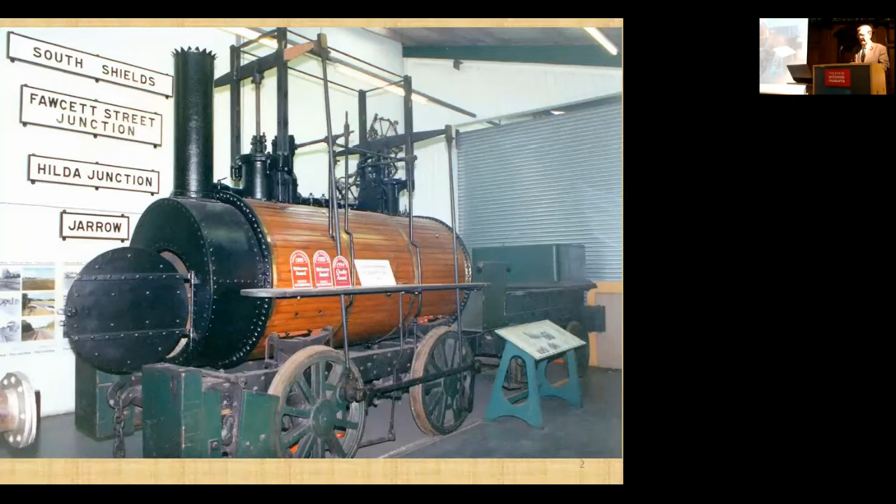So here we have a loco that, okay, it's in the Killingworth type format. We've got 2 cylinders set into the crown of the boiler. We've got an iron frame, very light frame, on top of which are 4, taking the 2 sides, 4 steam springs, which of course were part of that patent. The wheel sets were combined by the use of a surging chain, to use the term that they used, a surging chain.

So that's the locomotive as it first was constructed. But very soon, a number of alterations and improvements were made, which we will follow through in the trail of how it got from looking like this to how it looks as we see it today.

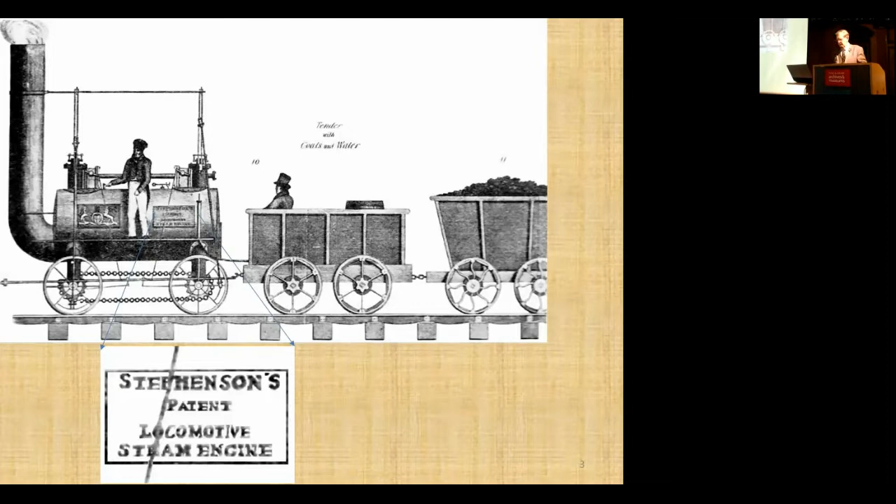So the first alteration that was made in the early 1820s was to increase the size of the wheels from 3 foot diameter to 4 foot diameter. Now, Nicholas Wood, in his treatise of 1825, tells us all about this improvement and how it benefited the performance of the engine.

Subsequently, the locomotive was reformed at the Robert Stephenson Co factory here in Newcastle. Some of the Killingworth locomotives were reformed at the factory, and almost certainly Billy was amongst them.

The steam springs were removed and replaced by plate springs. The plate springs were first used on the Killingworth line in 1827. They were first fitted to the vehicles, the wagons. They worked successfully, and so they then tried them out on some of the locomotive fleet on the line. And therefore, it's almost certain that Billy would have received the spring set at some time in the late 1820s.

Also, the surging chain has been removed and replaced by coupling rods. Now, the instigator of these alterations was almost certainly Nicholas Wood, because by this time, George Stephenson had moved on, and although he never lost his interest in what went on at Killingworth, nevertheless, Nicholas Wood played a day-to-day role and was almost certainly the instigator of these improvements. But she carried on with her same boiler.

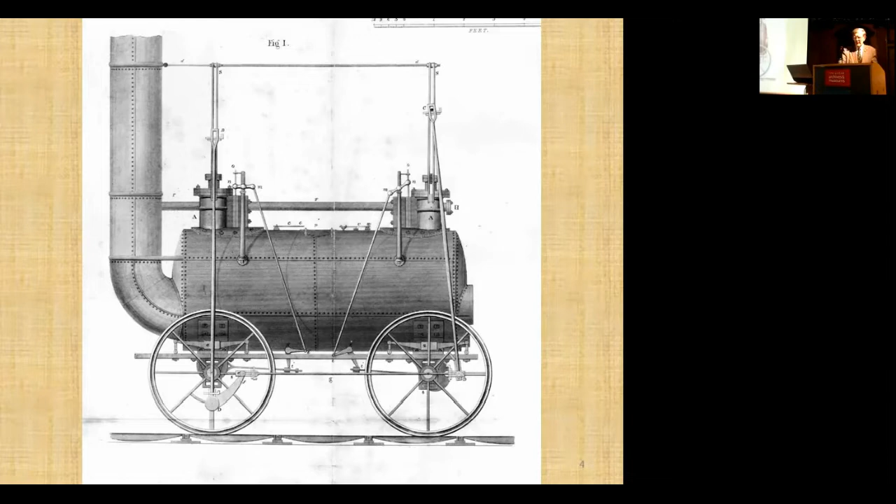The next alteration that took place was shortly after 1830, because here in Newcastle, the Robert Stephenson factory not only successfully won the Rainhill trials, but they also carried on developing the mainline locomotive, including the introduction of the sandwich frame, which was so much more robust than that light iron frame that we saw earlier. And all of the Planet class locomotives that operated on the Liverpool and Manchester Railway were fitted with sandwich frames. They were robust and made of oak or ash, plated on either side with wrought iron plates, hence the sandwich.

And so it's interesting that when Peter and I carried out a study 3 or 4 years ago, and Peter joins us this afternoon so we'll be able to speak with him later, we saw that the framework on Billy is of a sandwich frame type.

You see there the bulk of timber, the oak, and on the outer side is the plate of wrought iron, and on the inside there is a similar plate, but there are angle irons instead of ordinary straight plates. And in the lower photograph, you can see one of the stretcher beams going across the midpoint of the locomotive, again made of an oak beam plated on either side by wrought iron. So that means that the frames that we now see on Billy date from the early 1830s.

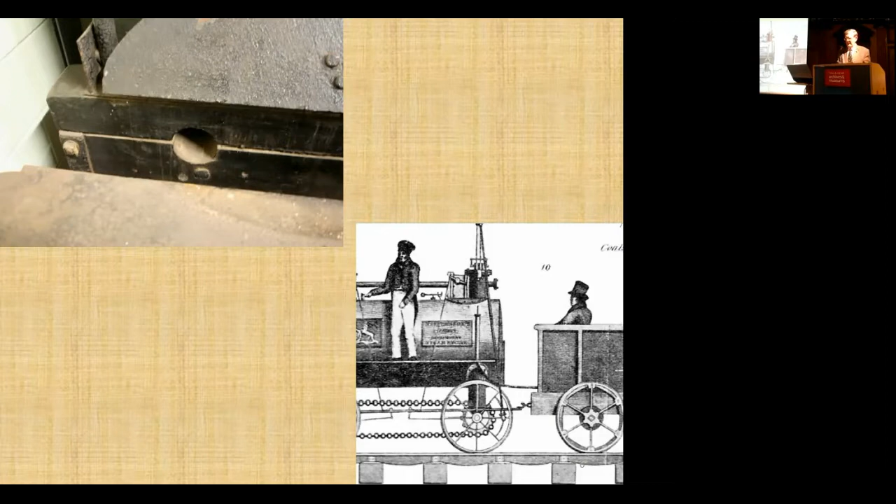The next thing we noticed from the records of the Robert Stephenson Company is that they took in more locos from the Killingworth Colliery, including almost certainly Billy, though they never identify which particular locos they served. The boiler was reformed. That 20-inch flue that was run through to start with was replaced by a similar diameter flue for the firebox. There was a round or slightly oval firebox. At the halfway point the tube plate was inserted, and from there to the leading end were a nest of tubes. The leading plate was a flue plate, and in advance of that was the smoke box upon which sat the chimney.

So although Billy carried on using the same boiler cylinder, the technology improved enormously, taking advantage of all that had been learned at Rainhill and afterwards, and a whole series of tubes were inserted, increasing the heating surface no end.

So the only other alteration to point out is the wheels. The original cast iron wheels were very vulnerable to breakage - they broke several times. Timothy Hackworth introduced the 2-part cast iron wheel, allowing the outer part to be replaced without needing to take the whole wheel off the axle, which was very time consuming. They could take off a cracked rim and replace it with a fresh rim much quicker than changing a complete wheel. This answered one of the main criticisms of the earliest wheels supplied by the Stephenson Company and others.

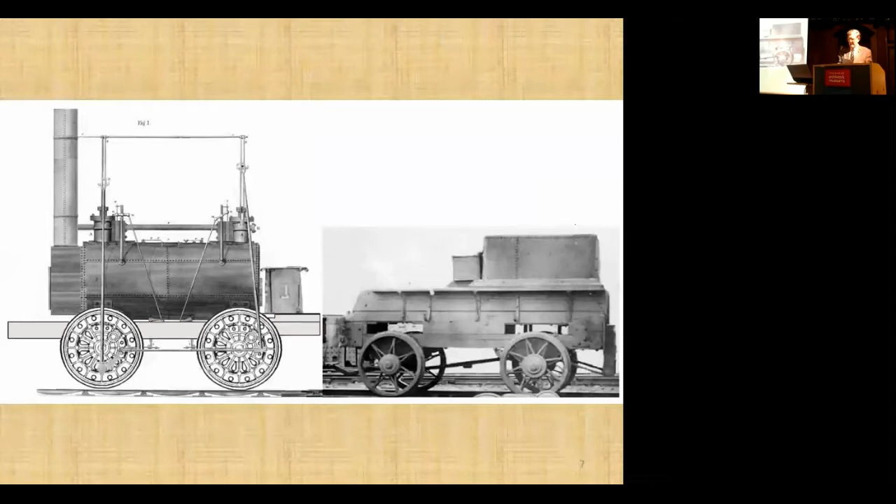But when Peter and I examined the boiler, we found a boiler of a different era. This was not the original boiler, it had been replaced. A boiler of this type would almost certainly belong to the late 1840s. You see it has a three-ringed boiler, and the boiler itself is not only longer but also of greater diameter - 10 feet long and 4 feet 3 inches diameter.

So that was interesting because it posed the problem: who made this replacement boiler? It's quite possible that the boiler was made on Tyneside, possibly by the Coulthard Company of Gateshead, who specialised in the provision of railway equipment for collieries and colliery railways.

So we were able to examine the boiler in some detail, and this is the first of a number of splendid drawings prepared by Peter, which make understanding of the locomotive so much easier than just looking at photographs. You can see there a cross-section of the current boiler. It's much along the lines of what I was just explaining, how it had been reformed originally in the 1830s, but this belongs to the 1840s.

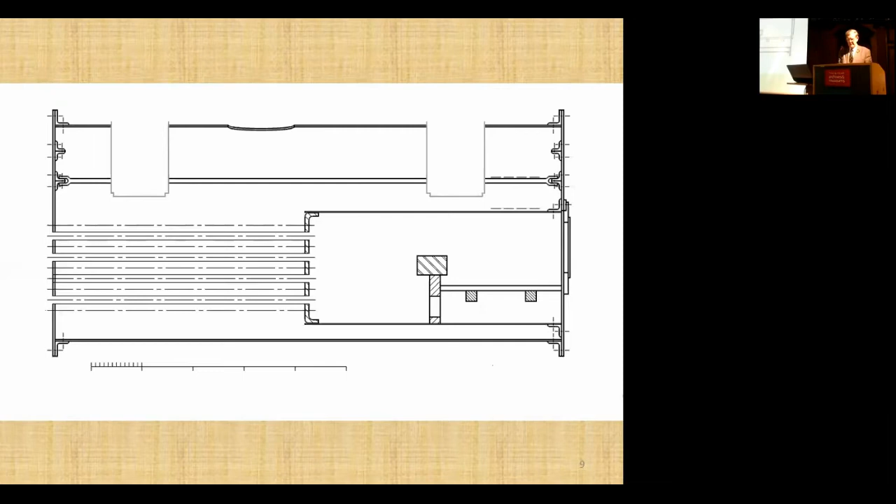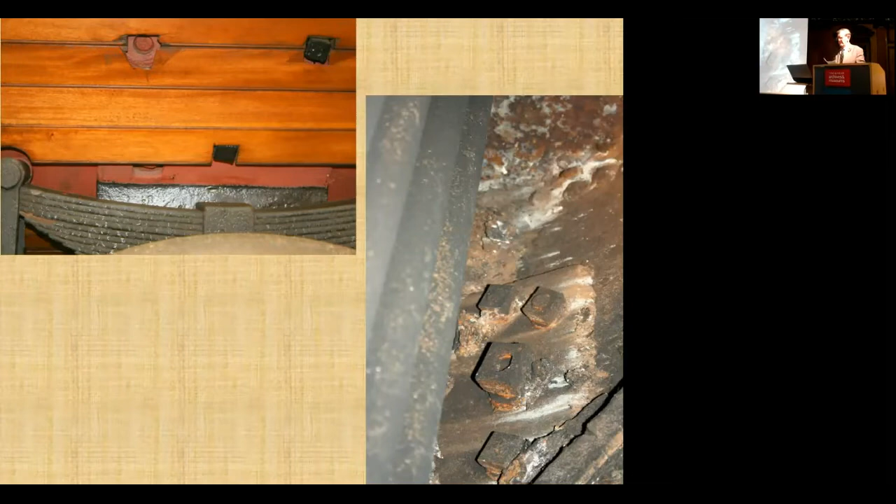The boiler was supported by brackets fitted to the frame. The feet of the brackets were bolted through the frame, and the upright of the bracket was curved round the boiler, and you can see that it was bolted into place. All four brackets were bolted into place, which means there was no expansion slide at all.

Every time the boiler was used, it must have been a bit like a banana wanting to bend. And so stresses were set up in the bolts and the holes of the bolts. And there was evidence in Billy that two of the brackets had set up stress fractures in the plates along the side of the brackets.

On the right-hand side picture, you can see a look inside the boiler. The front right bracket has been patched. Just see at the bottom there the patch. It could only have been fitted by removing the tubes and the front tube plate to gain access to it.

And there is evidence again in the archives of the Robert Stephenson Company that locomotives were taken in and repaired in the 1860s. So this is probably the work of the Stephenson Company that carried this out.

The other bracket that had a stress fracture was the left-hand rear bracket, and this almost certainly was carried out, the repair was carried out by the men at Killingworth itself, because it was not such a neat job as the one you can see here.

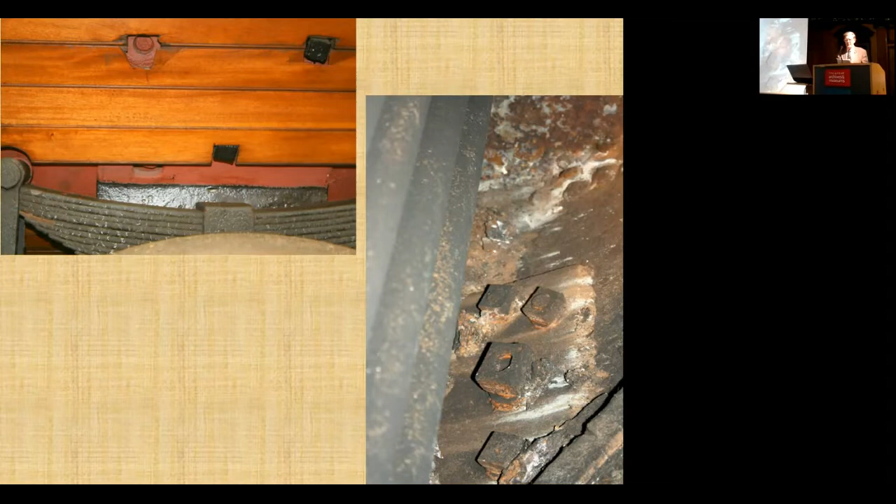They removed the bracket, they relocated it further back, and really it was a make, do and mend job, probably allowing the locomotive to continue to work under lower pressure at Killingworth for a few more years. This make, do and mend approach was quite common on the colliery system because money was always at a premium.

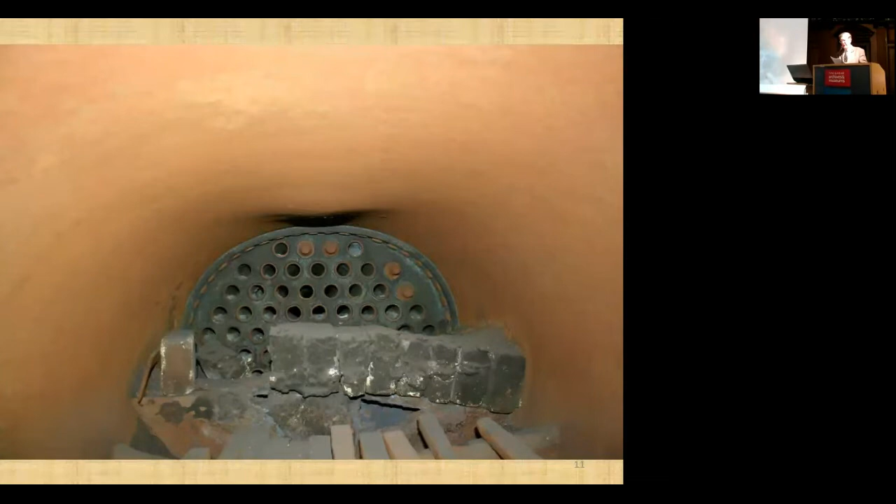Here we look inside the fire grate, the fire box at the fire grate. You can see there the crown has been depressed, which would make any fitter depressed, I should think, because that would almost certainly have taken it out of service once and for all.

In advance of the fire grate, you can see the wall, and beyond that is the combustion chamber, and then you have the flue tube.

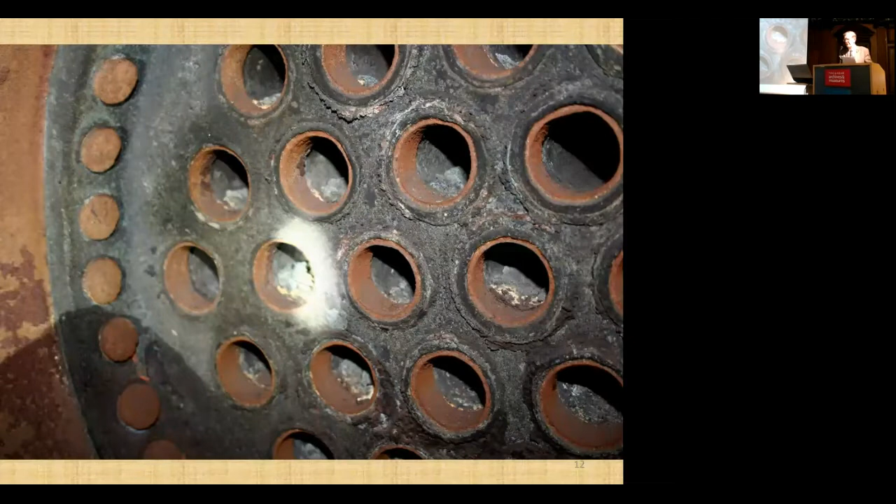There's a close-up of the tube plate. Now, I'm not the most athletic of people, so I didn't volunteer to go in and take this picture. But Peter, who's a lot fitter than I am, he did volunteer and went through and took this picture, which is rather splendid. Here's a close-up of the tubes, clunked into place, as they called it.

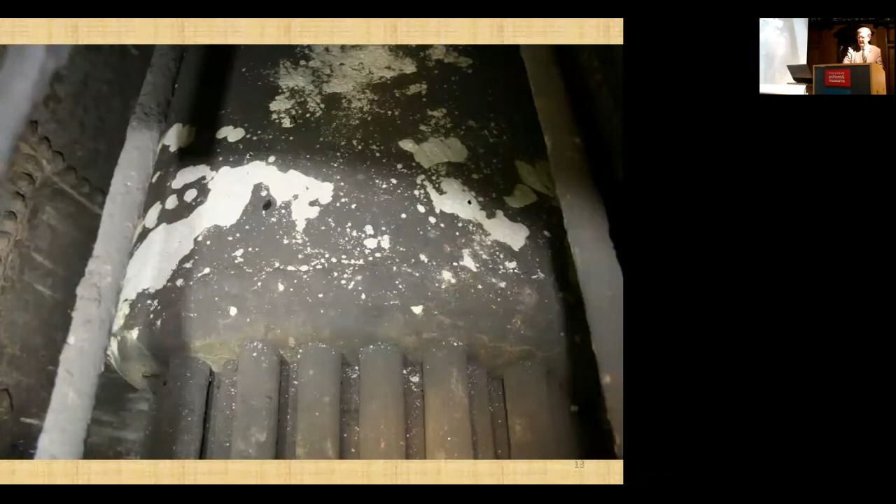Right, so now we're looking through into the boiler, through the inspection hatch. The inspection hatch was fairly easy to remove, but we had the assistance of the team at the museum here in Tyneside, and we were able to see inside the boiler to understand better what's going on.

So here is an external view of the firebox, at the front end of which is the tube plate, and then of course you have the nested tubes that are passing beneath where we're photographing. The two rods are both stay rods from one end of the boiler to the other.

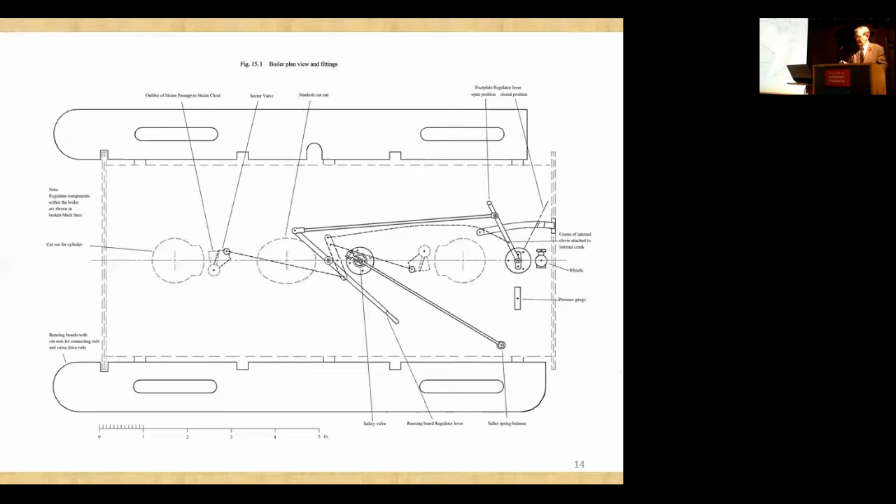Again, looking inside the boiler, Peter and I feel very privileged to be able to see inside the boiler of such a very early locomotive.

Here is the leading cylinder protruding down through the crown, and just in front of it is the steam access line through to the steam chest above the boiler crown itself. And you can see there it is segmental in shape, and the sector valve itself is open to its left, and by moving the regulator handle, it rotates around the fulcrum there to open or close that regulator valve.

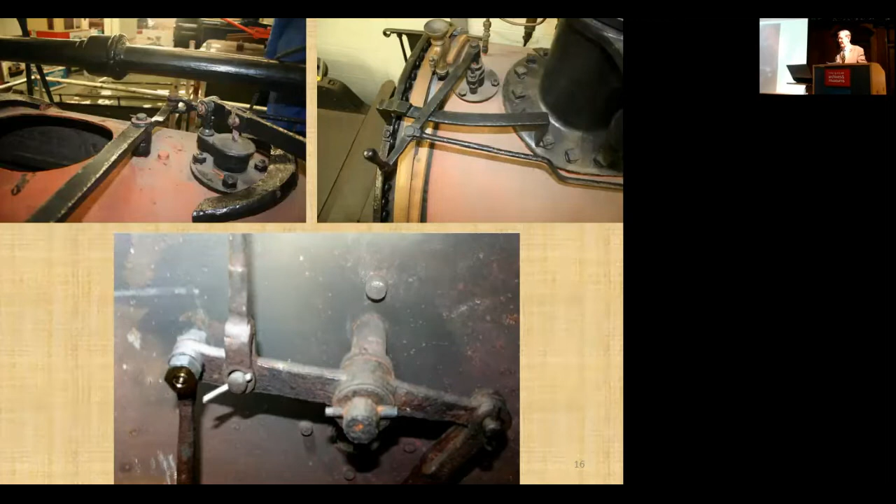Another look at the mechanism for doing that. On the top left photograph is the hatch opening from which we were just taking that photograph. In front of us is the regulator handle for the left-hand running board. The top right photograph is the regulator handle for operation from the footplate, linked through.

The photograph at the bottom is the pivot from which the mechanism is rotated by the handles and linked through to the respective valve openings, the regulator valve openings. So it's a very simple linkage through, but it works out well.

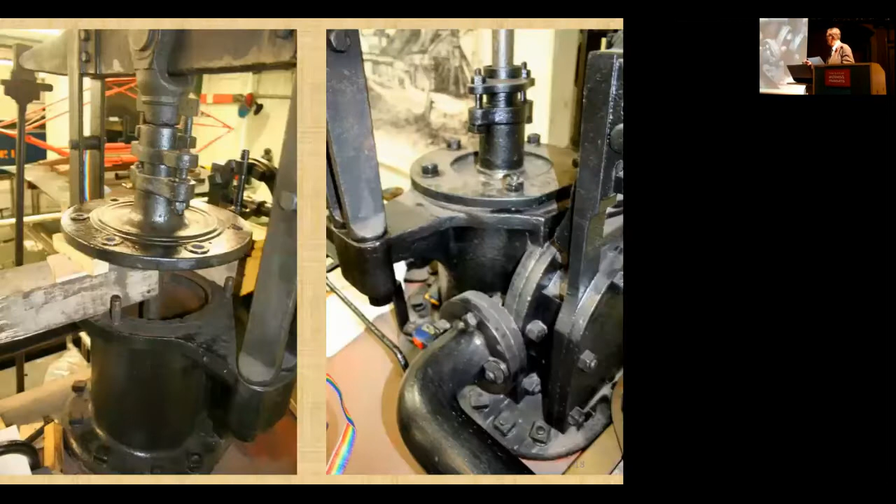Above the boiler is, of course, the top part of the cylinder and the steam chest and its valve. You can see there the passage - just there, that's the steam passage where the steam's coming up through that opening, the segmental opening we saw earlier. It passes then into the steam chest here, and the steam is then distributed along the internal passages there, with the valve reciprocating through in the normal way.

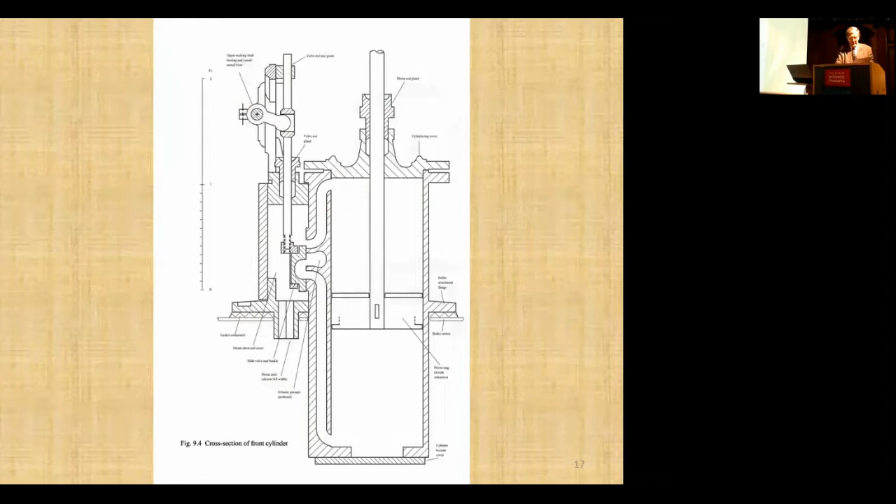Look at the cylinders themselves. The cylinders we now see on Billy are not the original ones, because the flanges fitting it to the boiler crown were made for a boiler of 4 feet 3 inches diameter, not the original 3 foot 9 inches diameter. Nevertheless, the two cylinders are asymmetric - you can see the cylinder covers are of different castings. So one of them perhaps was an original fitting on Billy, but the other perhaps was transferred from another locomotive that also had a boiler 4 foot 3 inches diameter.

So with the kind cooperation of the staff at the Stephenson Railway Museum, we lifted the cylinder covers and peered inside the cylinders themselves to see not only the interior, to check for any irregular wear that's been set up, but also, of course, to see the pistons inside.

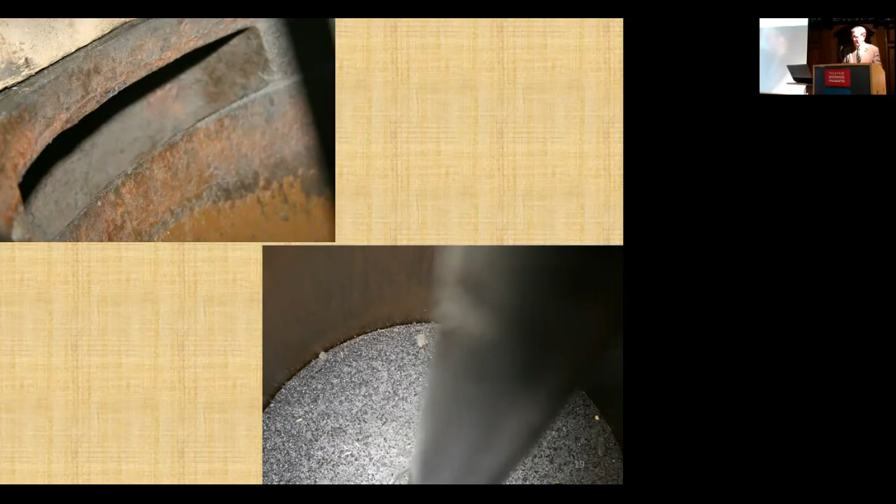Inside the steam chest, you can see the top photograph is the valve itself, cast iron, that reciprocates up and down according to the motion. On the bottom photograph, you can see the top end of that segmental steam passage, bringing the steam in from the boiler into the steam chest itself.

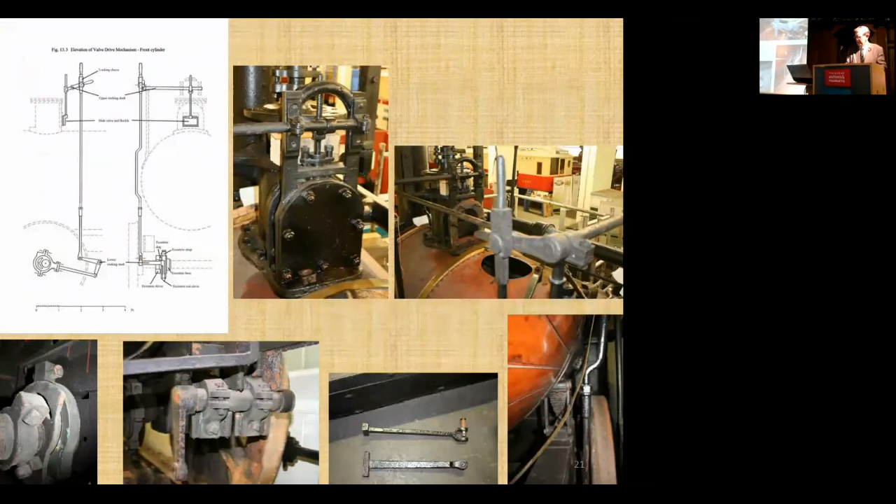Now for the valve gear, always a tricky topic. Peter's drawing in the top left is divided between a side view and an end view of the valve motion. You can see that the motion is driven by an eccentric on the driving axle, one for the leading cylinder and one on the rear axle for the rear cylinder.

The eccentric is linked by an eccentric strap and eccentric rod to a bell crank that operates the lower rocking shaft. The lower rocking shaft transmits the movement through to the long vertical valve rod that's driving the upper rocking shaft.

In between, there are, of course, the transverse rod, the actual rocking shaft itself, which can be detached from the vertical shaft by the driver when he seeks to alter his direction. It looks complicated, but actually the driver's got adept at lifting that lever, or lifting the vertical rod off the lever, moving the valves by hand, and then relocking by the vertical rod.

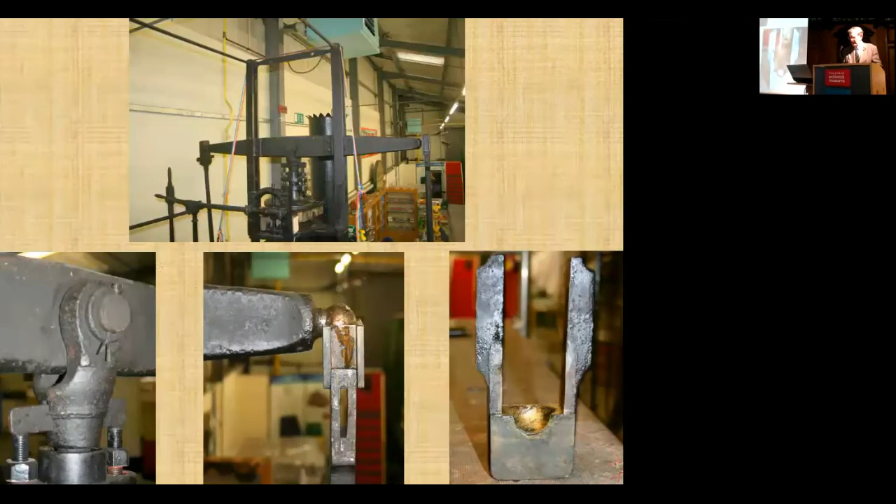Now to the driving motion. In the main photograph at the top there is the piston rod attached to the crosshead, the cast iron crosshead with a spherical end to it. This is a candidate for being a component that perhaps has outlived all the other components on the locomotive, but there is absolutely no evidence to confirm one way or the other what its date is.

The crosshead slides up and down in the slide bars, and the slide bars are retained in place by the stays, the longitudinal stays and the transverse stay. And if you look closely at the transverse stay, you can see two holes in there. As I said earlier, if there's a hole there, it's there for a purpose. You have to work out what that purpose is.

It's very easy, of course, in this case, because the chimney which is now fitted to Billy is ridiculous, absolutely ridiculous. It's far too short. Billy had a much taller chimney when in operation, and those two holes were for the stays to support that higher chimney.

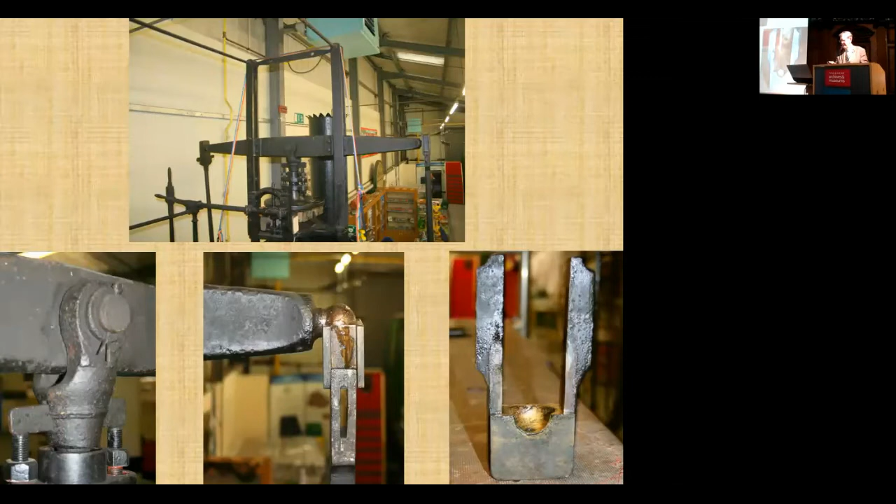Bottom left, you can see there a detail of the clevis, which transmitted the movement of the piston and piston rod and lifted the crosshead. Then there comes the photograph of that spherical bearing, the spherical end, with a lower bearing fitting in place, and on the bottom right is the upper bearing for the ball end turned upside down. So again, a real privilege to see some of these very, very early locomotive features that, of course, went out of use so many years ago.

Now we come to improvements to the frame. The front end of the frame was extended in the 1860s. In fact, there are a number of alterations dating from the 1860s, and they may very well have been carried out at the same time. But just to keep the locomotive going, these improvements were made.

Now the buffing pads were to suit the improvements that they made in the wagons that they employed on the Killingworth Colliery. They were faced with wrought iron plate so that they didn't suffer too readily with all the banging and crashing in the shunting.

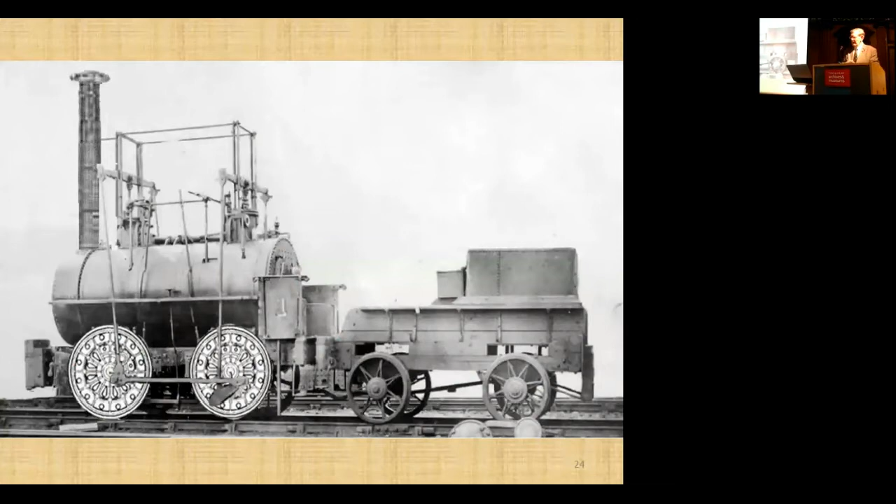So we come down to the 1860s, following the various alterations that were made. You can see there this is a photograph that's been turned into a montage, if you like. It shows a real photograph of Billy's boiler, but I've used it for this slightly earlier vision of Billy.

You see the boiler there, the larger boiler, 10 foot, 4 foot 3, a much taller chimney, stayed to the crosshead stays, retaining its buffer beams at the front end that we saw earlier, and also retaining its two-piece cast iron wheels. We know from archival evidence that these wheels continued to be used on Billy for much of its career. And once again, tacked onto it is, of course, that wonderful tender.

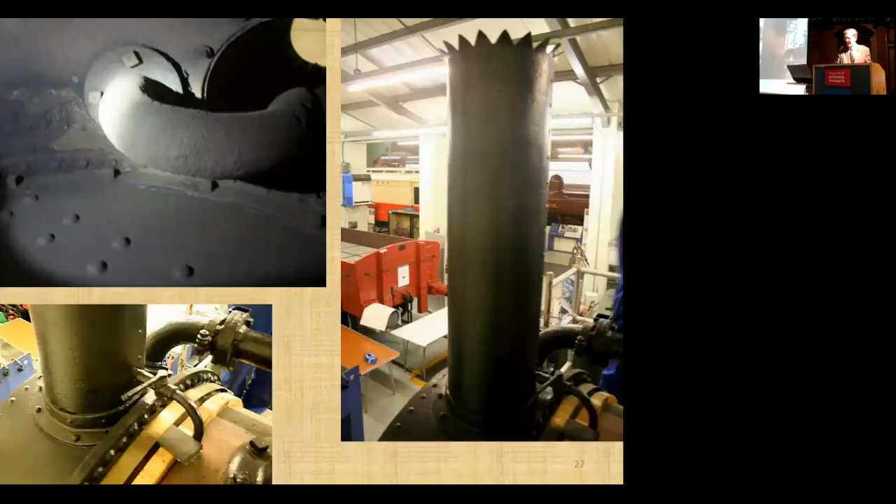There is this top left, coming through the crown of the smoke box and turning straight up into the chimney. On the bottom left photograph is a picture of the chimney sat on the smoke box with a pipe leading into it, which was the blower pipe, clearly from a much later era, and also a photograph there of the chimney. Now, I was rather rude about the chimney, and I continue to be rude about it, because it doesn't look anything like that which was ever used on Billy. And it was winced at every time I look at it.

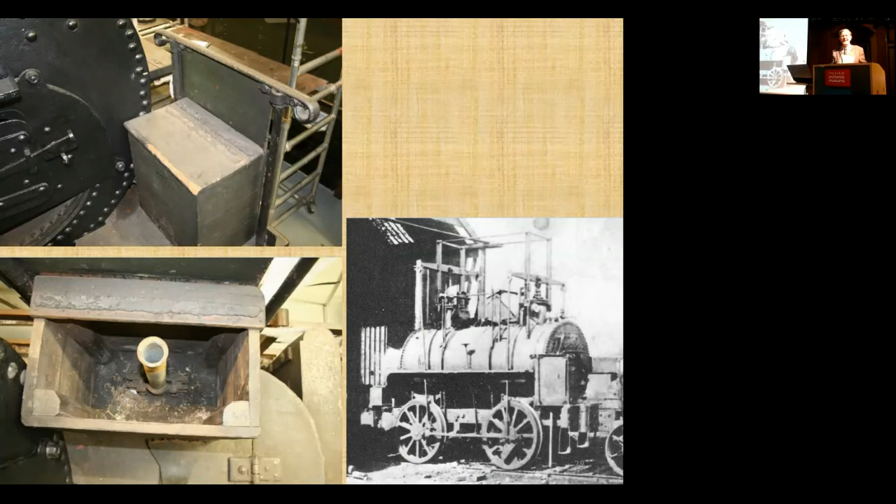Now we come to the footplate. There on the footplate are two large boxes. These are sand boxes, always an important characteristic of any locomotive used in the coal industry, because getting a grip and starting a train of coal wagons off is all important, particularly on an icy day or a wet day.

Right, now we come to photographs. This photograph is fairly well known. It was taken almost certainly at Killingworth. There's just no catalogue description that is positive that it was Killingworth. I believe it was taken just before the locomotive left Killingworth in 1881. So to explain, the loco was taken out of service in 1879 and was, as so often happened, just kept, not thrown away or scrapped, just kept.

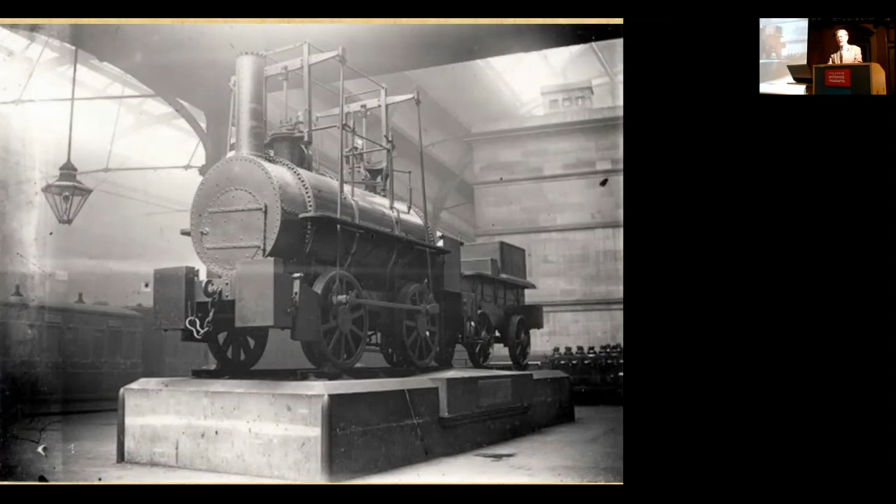When they'd finished, they didn't take it back to the high level bridge. They put it on another plinth, but this time on the central station platform, platform 9 to be correct, or what was then platform 9. Here is a photograph taken shortly after it had been unveiled.

Now, the North Eastern Railway did, I'll say, a good job, but in fact they did too good a job. For example, the cladding had deteriorated and they removed that and threw it away, and put their own cladding on. No ordinary metal cladding, no ordinary deal cladding - they put on mahogany cladding. Can you imagine Billy in the days it operated at Killingworth, operating with mahogany cladding? That would be laughed at, because they never had access to mahogany at that time.

In addition, the smoke box and the chimney were taken off and replacements were added on. So what you now see there are replica smoke box and chimney, and hence my comments about the ridiculous chimney. This is quite inappropriate. Some of the woodwork also had to be replaced as well.

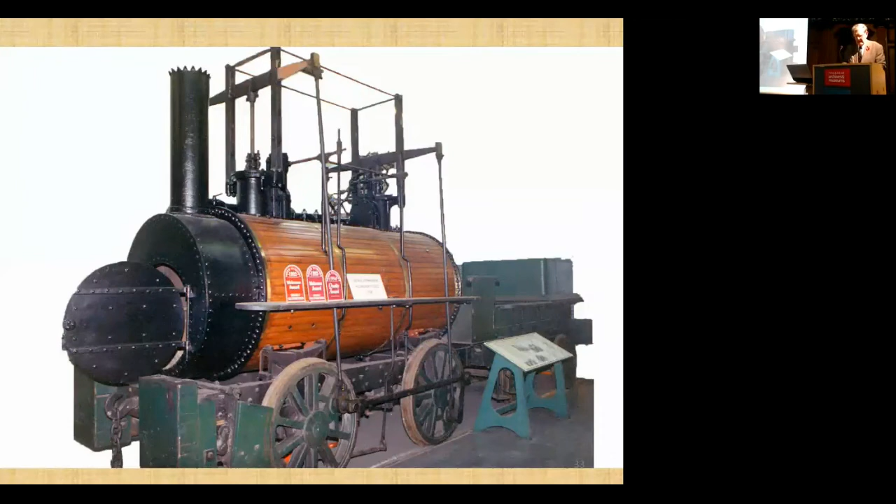But there it stood on platform 9 on the central station for another - until 1945. So what's that? That's 49 years, just under 50 years. And then it was taken down because the platform was to be reformed and widened to allow for an increase in the number of trains using the central station. So that is the story of the Billy itself.

It was taken to the Palace of Arts building in Exhibition Park, and there it remained until 1981, where I first saw it. In 1981, it was removed from the town moor through to the Metro Test Centre, which by that stage had been taken out of use. That in turn became the Stephenson Railway Museum, and that opened in 1988. Billy has been on display at the museum since that year.

Since the report that Peter and I prepared about the loco, the whole of the presentation at the Stephenson Railway Museum, I'm told, has been significantly improved to incorporate some of the new facts that we have been able to make available. That's not quite the end of the story, because we have to come back to the tender.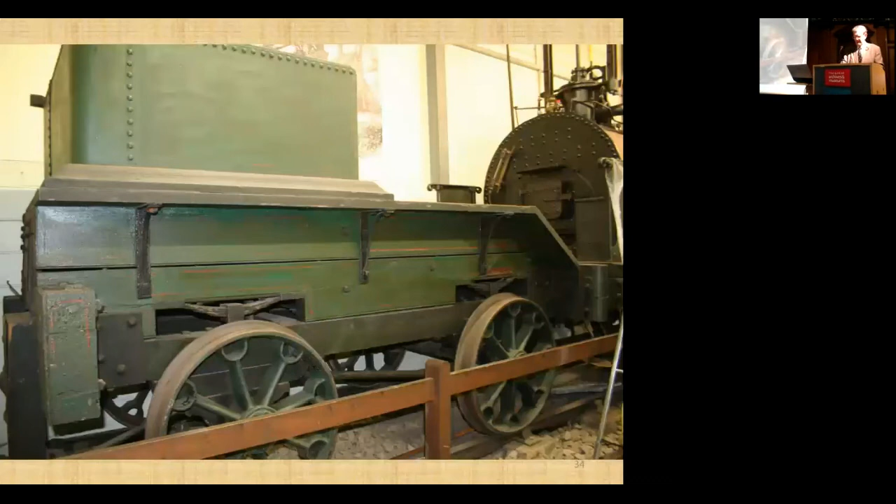There's this wonderful tender. It really is a splendid vehicle. It's a timber-framed vehicle, belonging almost certainly to the 1830s. Whether or not it ever was paired with Billy, in a sense, doesn't matter - it is contemporary. It has a wrought-iron tank fitted to the upper surface.

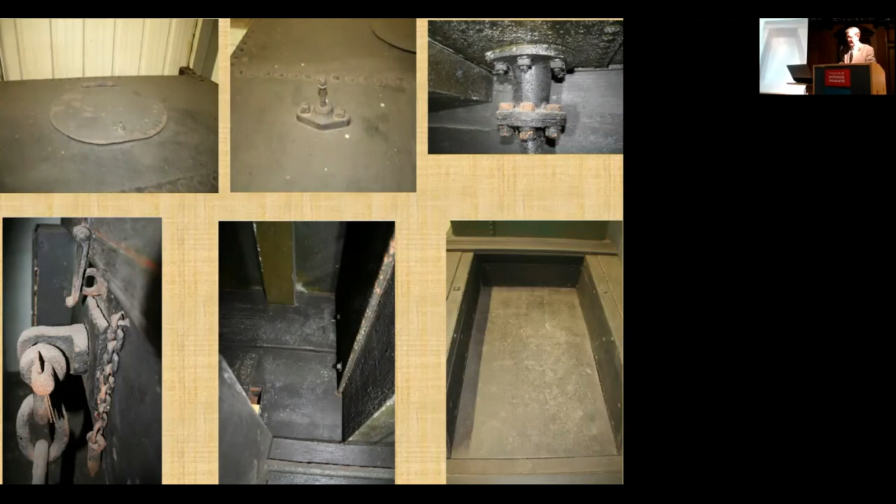You see the top left picture is the filling hole and cover and gap. The second picture is the tap to open up the discharge tap at the bottom of the tank, so that rod runs all the way through the tank through to the discharge tap, which is in the top right on the photograph.

The bottom left shows the rear end of the tender, with a much simpler, lighter fitting - none of the strong draw hooks and volute springs that you saw on the front end of the loco. So this indicates that it was used in the forward direction for the purposes of drawing the empty wagons back from the Tyne to Killingworth. The centre bottom photograph is the huge void underneath the tank, showing the wooden frame structures, and the picture on the bottom right is the coal space that was used.

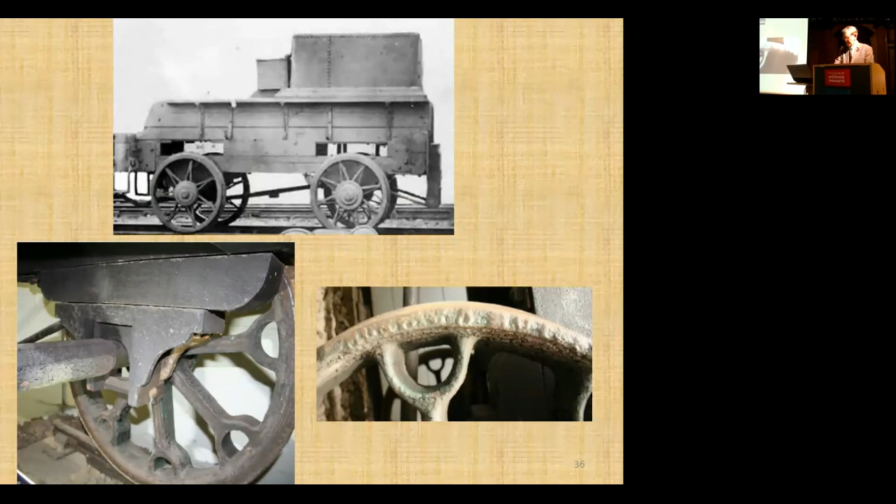Well, that all sounds fairly straightforward, but now comes the problem that Peter and I had very great difficulty understanding, because the top main photograph shows Bleasdale's photograph taken in 1881. Just have a look at those wheels, star form wheels - quite normal, quite understandable use of that cast iron wheel arrangement.

Now have a look at the wheels at the bottom, the wheels that are on there now. They are not the same wheel sets. They are substitute wheel sets, and they are fitted to an octagonal axle.

Clearly a make-do-and-mend arrangement, because the journal of the axle is 3 inches in diameter, whereas the bearing for the wheels is 4 inches. So quite clearly not made to match at all.

But just have a look at the spokes - they're quite different and quite unusual. For a long time, Peter and I felt that this perhaps had been altered in America. But we now understand, as a result of discussing it at the Early Railways 7 conference this last June, a member of the audience said, 'I have got a photograph of the North Eastern Railway coal wagons with that form of spoke.' And bless him, he did turn it up, and we could see that this form of spoke had been used here in the northeast of England at some stage in the 19th century.

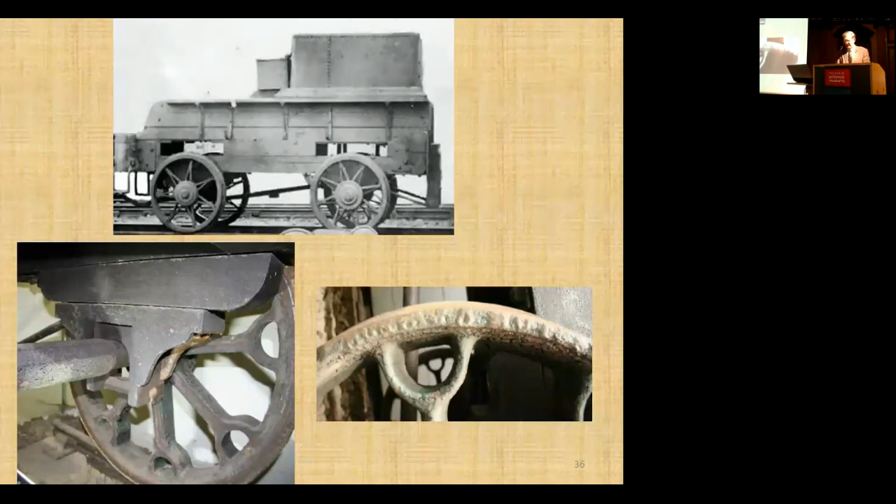So that meant it did come from a northeastern cast iron factory. The name of that factory is embossed on the outside, bottom right photograph - you can see there is embossing, almost certainly saying the name of the foundry. But do you think we could read it? We looked at it from every angle and tried to read what it says, but without success. We could not match it up with any foundry. If anybody's got nothing to do for an afternoon, go and have a look at Billy's wheel sets, have a look at those words, the foundry name, and see if you can work out which foundry cast these wheel sets. And that really is the end of the story.

Thank you very much indeed for your attention.